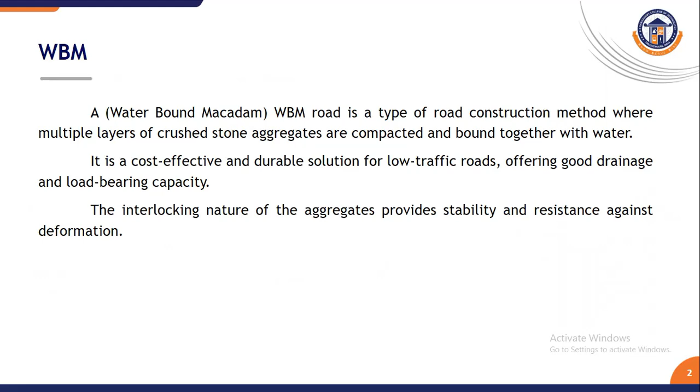Waterbound macadam road is constructed by laying multiple layers of crushed stone aggregate that are compacted and bound together using water. This type of road offers a cost effective and durable solution, especially for roads with low traffic volume. The method ensures good drainage and high load bearing capacity, and the interlocking of stone aggregate contributes to the structural stability and reduces the risk of deformation under the load.

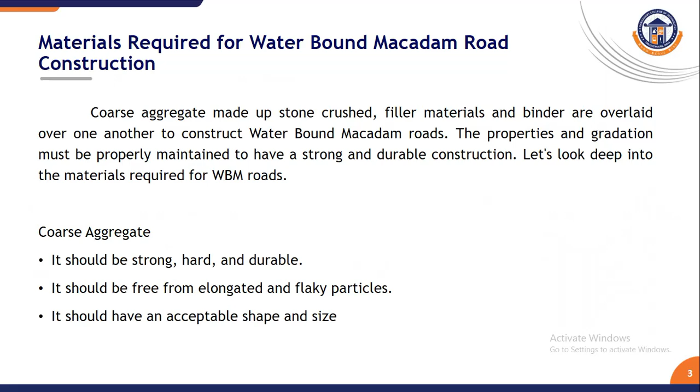This one is the material required for waterbound macadam road during construction. The construction of waterbound macadam road involves coarse aggregate, screening or filler materials, and suitable binders. Coarse aggregate must be strong, durable, and free from flaky or elongated particles to ensure interlocking. The filler material helps fill the voids between the aggregate, and the binder enhances the binding strength. Finally, proper material gradation and quality control are essential for achieving durable waterbound macadam road surfaces.

Next one is the screening, that means the filler materials. Screening materials are smaller sized aggregate used to fill the voids between coarse aggregate after compaction. These materials ensure a tight interlock and better binding. IRC, Indian Road Congress, recommends non-plastic materials like kankar, murum or gravel for screening to reduce the cost of roads. The standard grading for screening should be followed to maintain compaction quality and road performance.

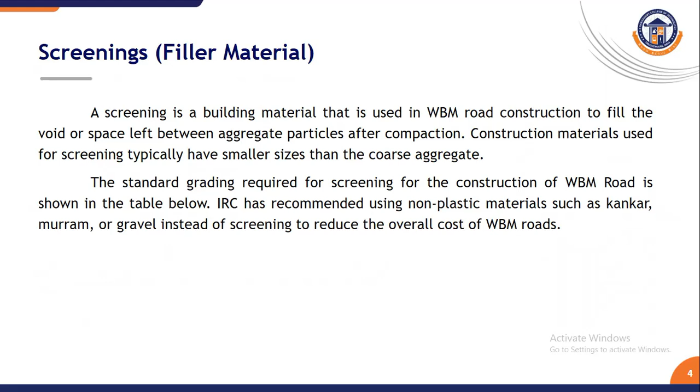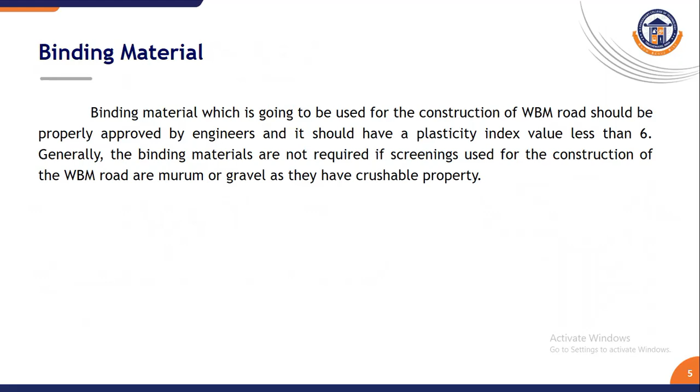Next is the binding material. Binding materials are applied over screening to further fill the voids and hold the aggregate in place. The plasticity index of binding materials must be less than 6. When screenings like murum or gravel are used, separate binding material may not be necessary.

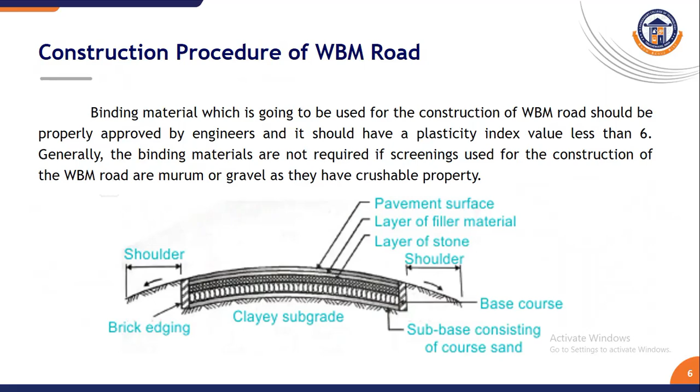This one is the construction procedure of waterbound macadam road. The construction follows a systematic procedure, starting from preparing the foundation and lateral confinement, to laying and compacting aggregate, then applying screening, and finally binding materials. Each step must be carefully executed to ensure stability and longevity of the roads.

Next one is the preparation of foundation for waterbound macadam roads. The subgrade serves as a foundation layer supporting the base, subbase and wearing courses, and it must be brought to the required level through necessary filling and cutting. The surface is cleaned, uneven spots are corrected, and the entire subgrade is well compacted.

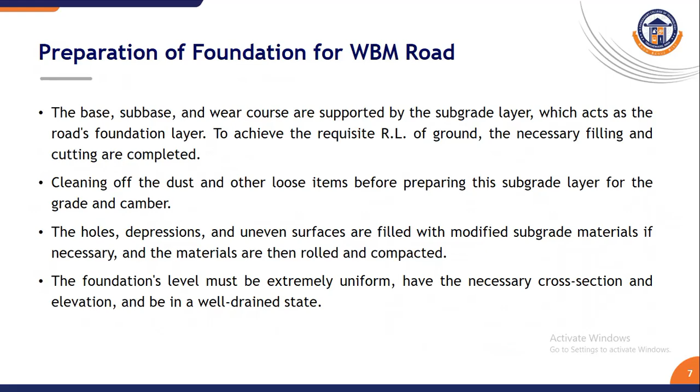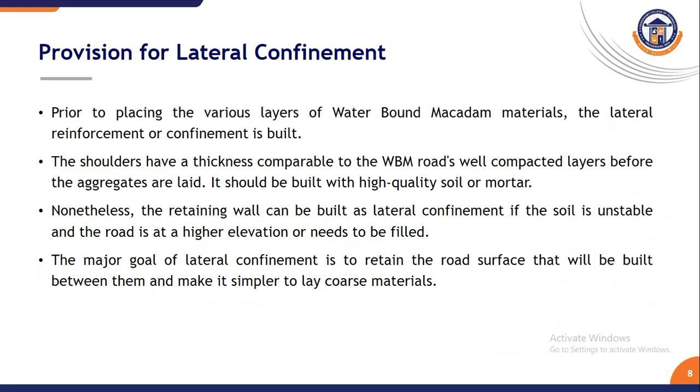The next one is provision for lateral confinement. Before laying waterbound macadam layers, lateral support is provided using earthen shoulders or retaining structures. The shoulders must match the thickness of waterbound macadam layers and be made of good quality soil. In areas where the soil is unstable or elevation is high, retaining walls may be used.

Next one is spreading of coarse aggregate. Coarse aggregates are placed in heaps along the road at intervals and spread evenly using tools or machinery. The thickness of each compacted layer is usually 75 mm for minor roads and up to 150 mm for major roads, and templates are used to ensure the correct profile, camber and gradient across the road structure.

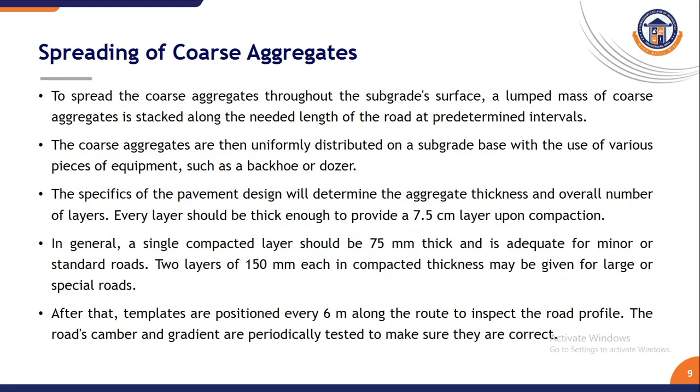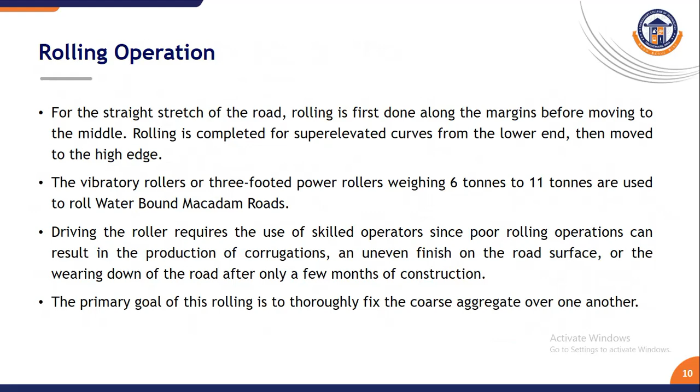The next one is the rolling operation. Rolling is performed using a vibratory or 3-wheeled roller weighing between 6 to 11 tons. It begins from the edges and proceeds towards the center. On curves, rolling starts from the inner edge. The purpose is to compact the aggregate thoroughly and achieve interlocking. Skilled operation is required to prevent unevenness or surface damage.

The next one is application of screening. Screenings are spread over the compacted aggregate to fill the voids. About half of the voids are filled with the screening and the rest with the binding materials. Each layer is checked for uncompacted material, which is removed by brooming.

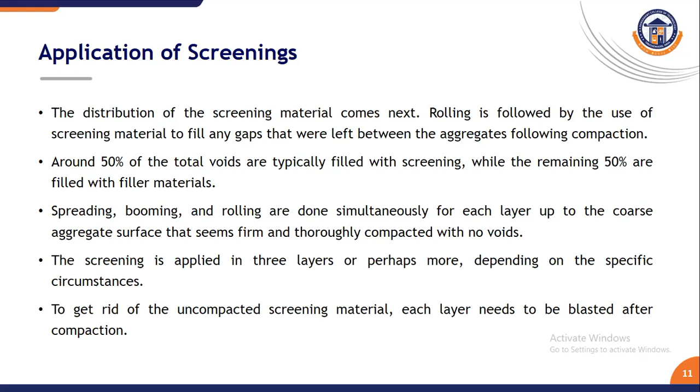Then sprinkling of water and grouting. Water is sprinkled on the compacted layer, followed by further rolling, which helps to carry fine particles into the voids and ensure the tightness of bond. The process is repeated until all the gaps are filled and the surface appears well bonded.

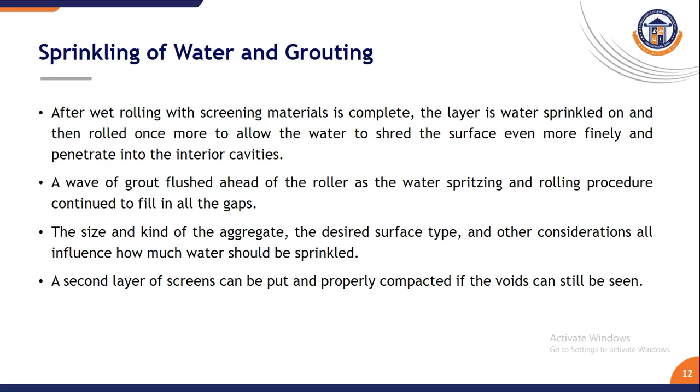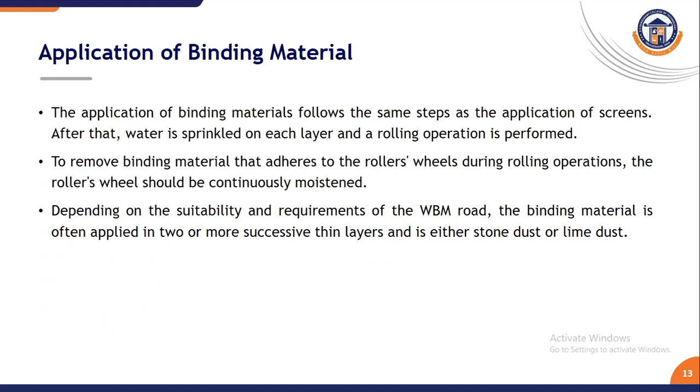The next one is the application of binding materials. Binding materials are spread in layers over the surface and water is sprinkled before rolling. The roller wheels are kept wet to avoid sticking of materials. It's important. Two or more layers of binding material may be required, typically using stone dust or lime dust, to achieve a smooth and compact road surface.

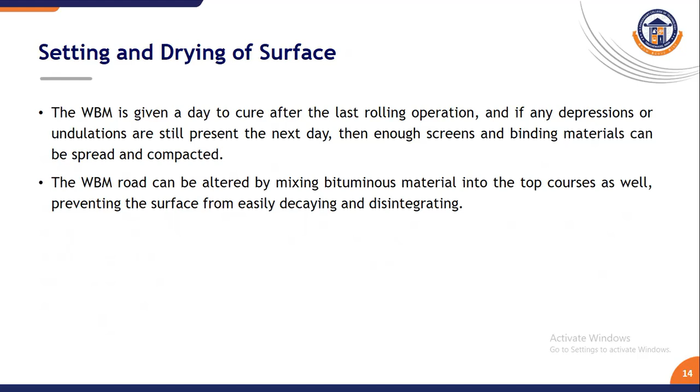The next one is setting and drying of the surface. After final rolling, the surface is left undisturbed for at least a day. Any uneven spots or depressions are corrected using the screening and binding materials. Finally, the durability of the surface can be enhanced by applying a bituminous layer to the top course, which reduces weather related damage.

The preparation of shoulders. As the road is being cured, shoulders are built adjacently while maintaining the proper slope with earth filling. Properly prepared shoulders provide additional stability and prevent lateral spreading of the road layers.

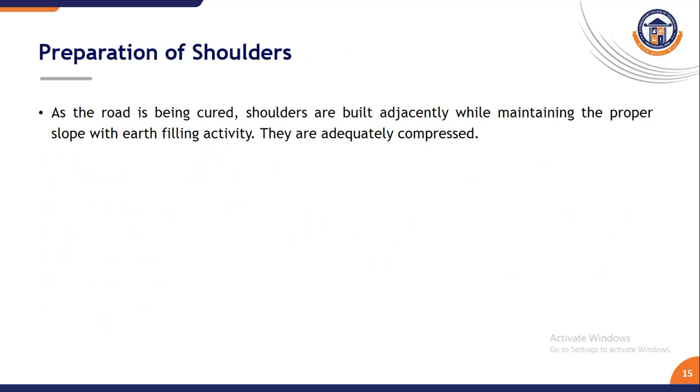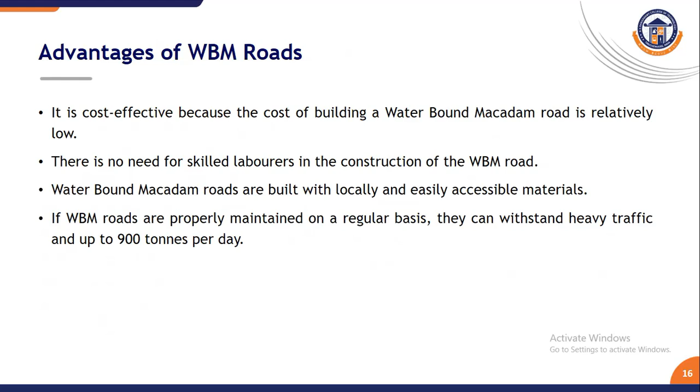The advantages of waterbound macadam roads. Waterbound macadam roads are economical and use locally available materials, and their construction does not require highly skilled laborers. It's the main advantage. When maintained properly, they can handle significant traffic volume up to 900 tons per day. These roads are especially suitable for rural and low traffic areas.

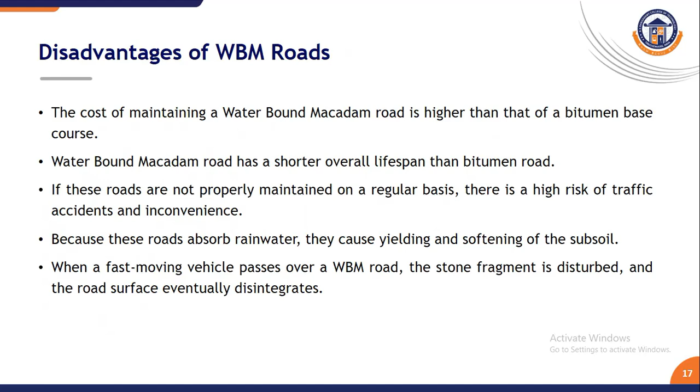The disadvantages of waterbound macadam roads: although cost effective, waterbound macadam roads require frequent maintenance, especially compared to bituminous roads. They have a shorter lifespan and are more prone to damage from water and fast moving vehicles, and poor drainage can lead to subgrade softening and surface disintegration over time.